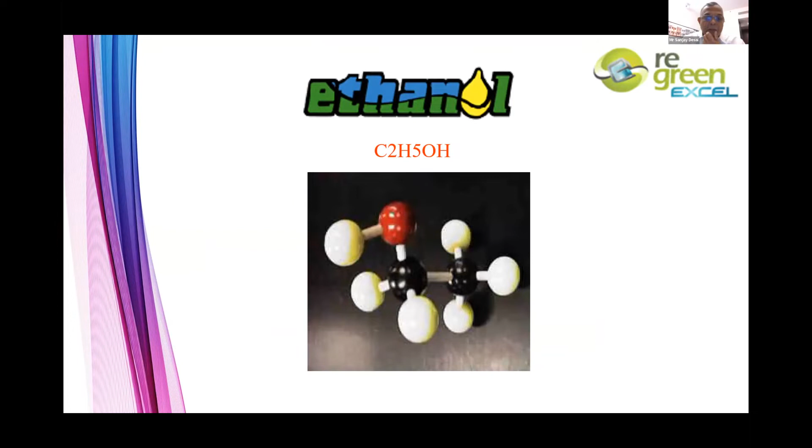In our company, we have built 100 plants. Out of these 100 plants, 50 plants have the capability to use sugarcane syrup, and in the off-season they would be using molasses. Interestingly, quite a few of them are adding a grain section for the off-season, so almost 25 of them will be using grains.

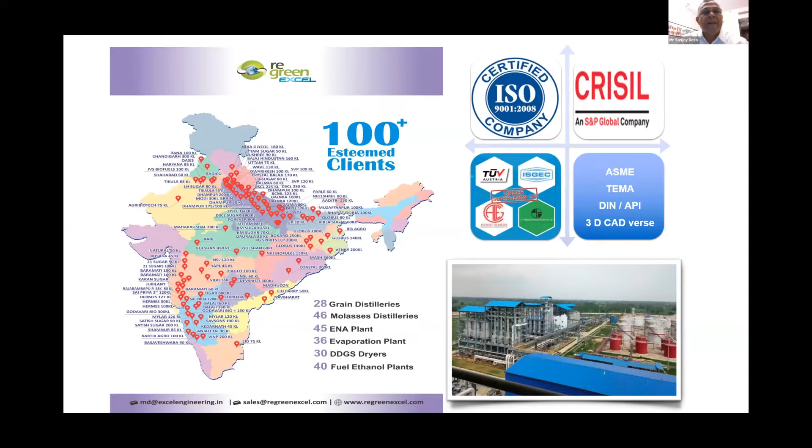When it comes to cost of production, feedstock cost is major, then utilities, manpower and other things. As all the panelists explained, feedstock quality is very important to achieve lower cost of production.

It's very interesting to note that utility consumption and effluent treatment cost also depend on feedstock quality. If you have more VA, more bacterial load, we won't be able to achieve good fermentation efficiency or good alcohol concentration. Then indirectly the utility cost will go up, and the effluent treatment will become more difficult due to low solids.

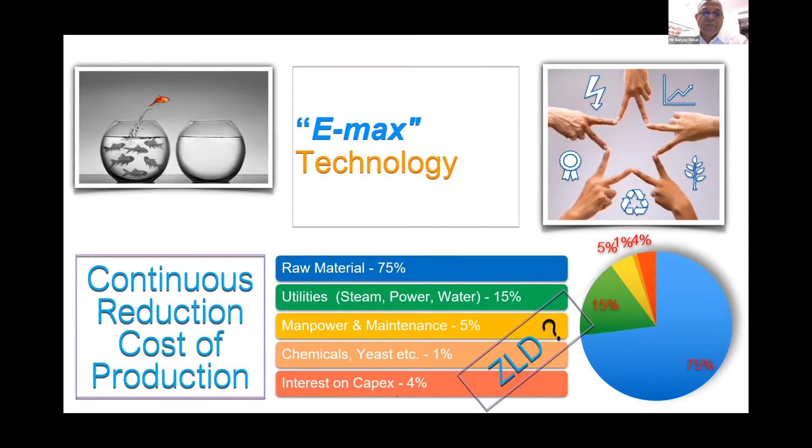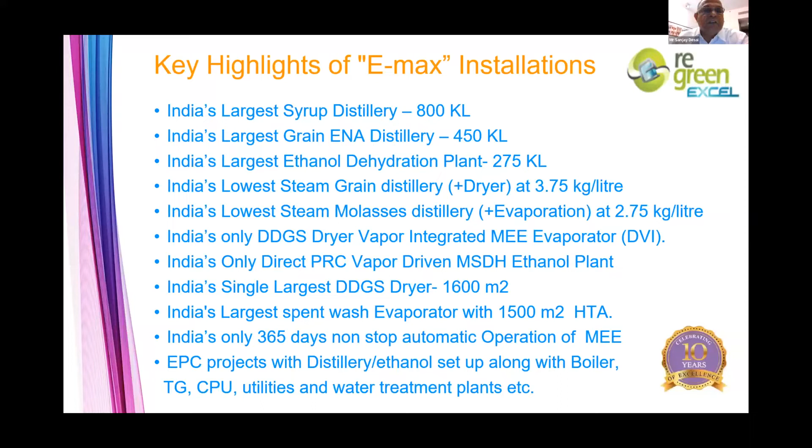So how has the industry aggressively taken steps toward sugarcane syrup? Mr. Narendra Mohan ji already explained the pros and cons of that. You can see the intent of the industry - one of our customers in Karnataka is building an 800 KL syrup to ethanol plant, which will be commissioned next week. These are, of course, the various feedstock options available.

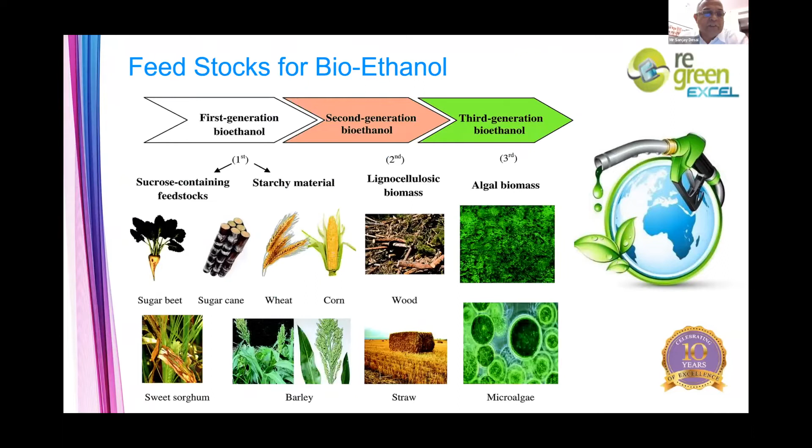Today we are discussing sugarcane to ethanol. As per government policy, 50% of the ethanol will have to come from sugar industries, and another 50% will have to come from grain to fulfill the E20 mandate. This means that with only molasses - C molasses, B heavy molasses - we cannot achieve 50% of the 20% mandate from the sugar mill. So definitely, sugarcane to ethanol is going to be very crucial.

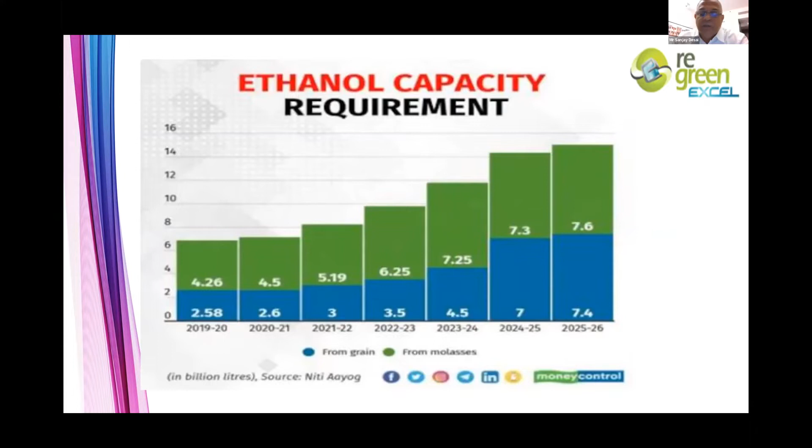In our estimate, around 5 to 6% will come from molasses to ethanol, another 5% has to come from direct sugarcane, and another 7 to 8% will come from grains.

All the panelists already explained that high VA and high bacterial load is going to be an issue. Apart from this, variation in brix on a day-to-day basis also is going to be an issue for fermentation. I would like to touch upon a few more aspects here - why does VA increase in sugarcane syrup?

One reason is, of course, not having proper sanitization. One can always think of using sanitization chemicals and also antibacterial agents to bring down the bacterial load and also bring down the VA.

Apart from this, once we switch over to mechanical harvesting of cane, again VA is going to be a problem, because once VA increases in the cane or the syrup juice itself, it will be very difficult to manage the VA in the sugar mill.

This is one very important thing, because we have experienced in other countries like Thailand, Philippines, Indonesia, that when they switch over to mechanical harvested cane, controlling VA becomes very, very difficult. This is one point I would like to add.

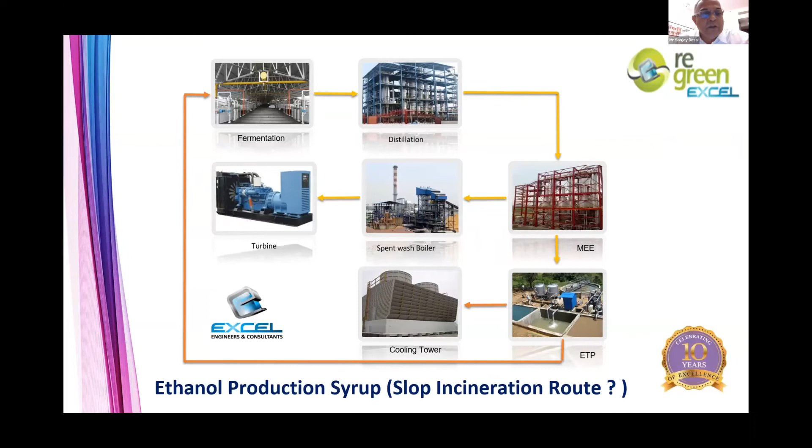So definitely one needs to really relook at designing the effluent treatment plant. Probably we can have two simple systems with common facilities. Maybe we can go with the spent wash boiler route for molasses and B heavy molasses, then add a simple spray drying system for the sugarcane production, ethanol production during the season. We'll have to work out a lot of utility balance and common facilities in terms of designing and operating.

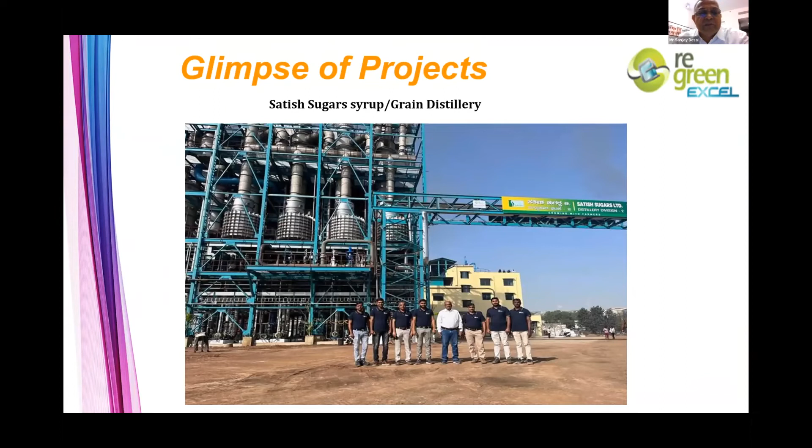Initially the VA was very high because we were reaching the fag end of the crushing season, so control on the cane and other feedstock was an issue. Now, by using chemicals, we are able to bring down the VA by 50%. Still, work is going on.

Similarly, there was a very high bacterial load. Again, we used a lot of chemicals, and then the fermentation improved.

One very important point discussed by Dr. Sanjay Patil is the corrosion of equipment. When we have very high volatile acid and high bacterial load, the pH drop in the fermentation is very fast, so it can go as low as 3 in the fermentation. Then in the spent wash and spent lees, it goes below 2.5, so it becomes very difficult to really take care of the equipment.

We have observed that all the reboilers at the column pot have to be SS316 tubes, and the recovery column also has to be 316. Apart from that, we have to take care of many other equipment like sealing systems, vacuum pumps, MOC, as there could be a lot of failures in the pipelines. So one should really try to upgrade the material of construction of the distillation and dryer operations.

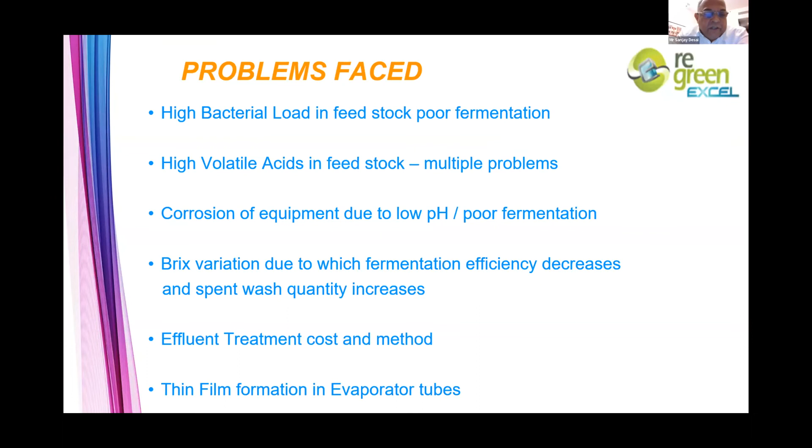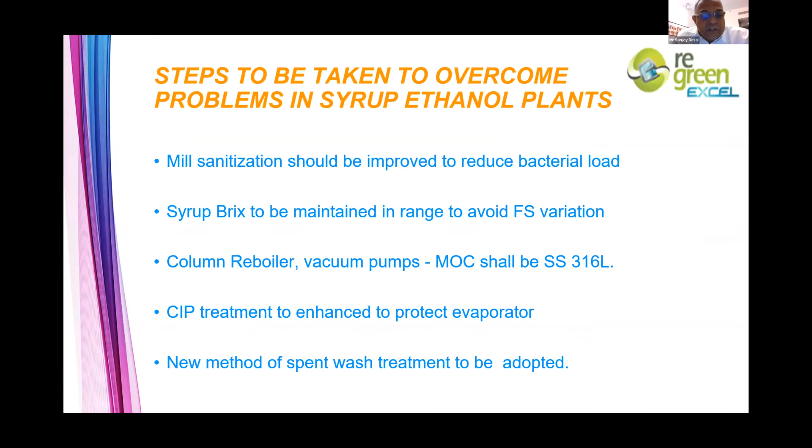So I think many of these topics are already discussed. So of course, it is very important to adopt a new method for spent wash treatment. Could be a spray dryer or composting. So that gives a better economics.

So I think I should end this topic without actually making a conclusion because this industry is new to all of us, technology providers, production companies, and also the institutes. So we should really work hand in hand, try to share information and data, because every factory, every region has a different problem. So a lot of technical interaction is required amongst all of us.

So then we can identify each and every problem. Then we try to give a solution to the industry. So that's why I'm not making any conclusion here.